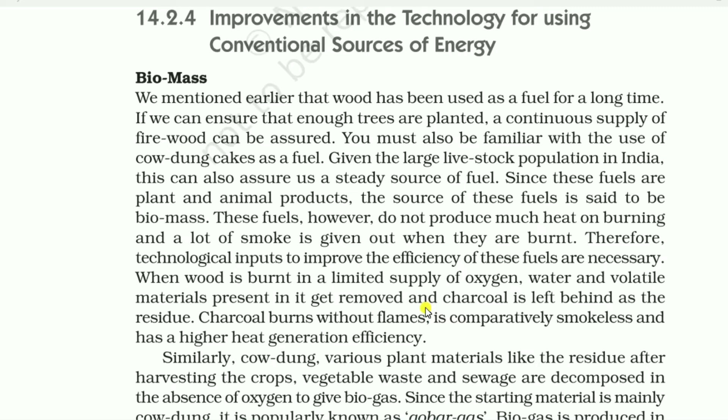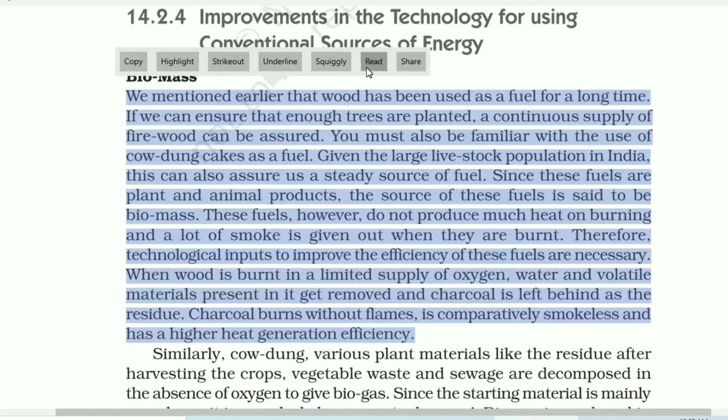So these two can be achieved from the fossil fuel, from the conventional sources of energy, if we improve it. That is the improvement in the technology. Okay, read this topic. We mentioned earlier that wood has been used as a fuel for a long time. If we can ensure that enough trees are planted, a continuous supply of firewood can be assured.

You must also be familiar with the use of cow dung cakes as a fuel. Given the large livestock population in India, this can also assure us a steady source of fuel. Since these fuels are plant and animal products, the source of these fuels is said to be biomass. Okay, this is called the biomass. So we are talking about biomass now. It contains two categories. One is animal and second is plant products.

These fuels, however, do not produce much heat on burning and a lot of smoke is given out when they are burnt. Therefore, technological inputs to improve the efficiency of these fuels are necessary. When wood is burnt in a limited supply of oxygen, water and volatile materials present in it get removed and charcoal is left behind as the residue. So this is called the pyrolysis method.

We know, when wood is burned, it will give you huge amount of smoke and the calorific value is very less. But still now we are doing that. But if we improve the technology in this method, then we can convert wood to charcoal. Charcoal burns without flames, is comparatively smokeless and has a higher heat generation efficiency.

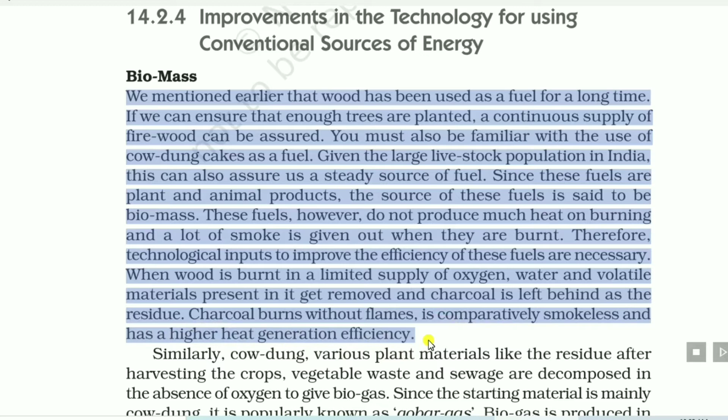Okay, you know also coal is a fossil fuel, it is a conventional source of energy. When coal is burned without oxygen, then it can be converted to coke, and coke is a better fuel with respect to the coal. So if this process is adopted, improvements in the technology, then we get coke.

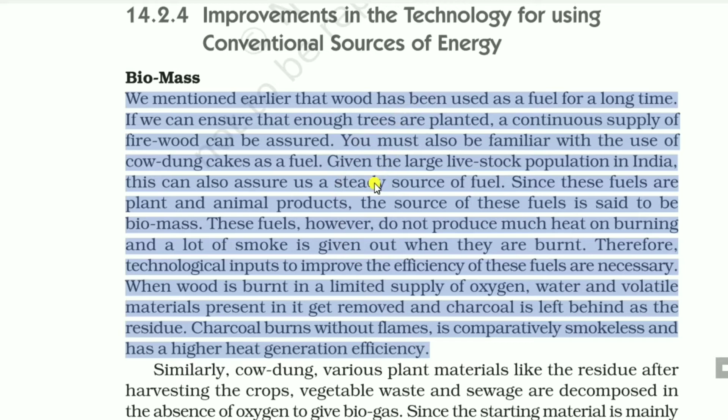Coke is a better fuel, it will give you high efficiency of heat, but less amount of residue, and also it will not make pollution in the nature. So that is needed. Charcoal burns without flames, is comparatively smokeless and has a higher heat generation efficiency.

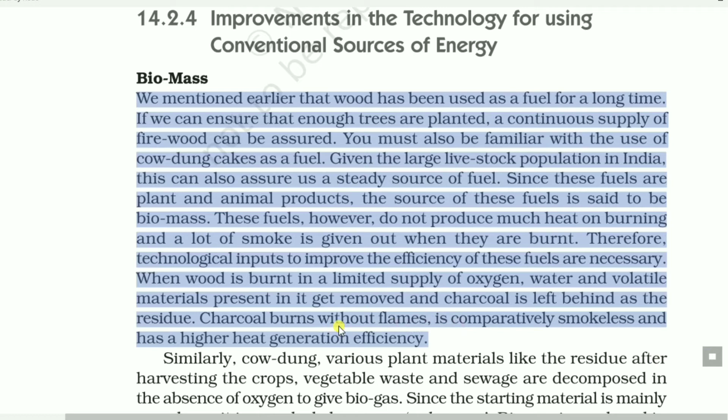Similarly, cow dung, various plant materials like the residue after harvesting the crops, vegetable waste and sewage are decomposed in the absence of oxygen to give biogas. Since the starting material is mainly cow dung, it is popularly known as gobar gas. Biogas is produced in a plant as shown in Fig. 14.4. Such type of biogas is formed in the nature.

It will give you different types of gases like methane, carbon dioxide. You know, these are the greenhouse gases, and after all it will give you the global warming. So if we use these gases in a technologically advanced way, then it will give you biogas, that is called the gobar gas. And gobar gas will not only give you 75% of methane, which is very good fuel,

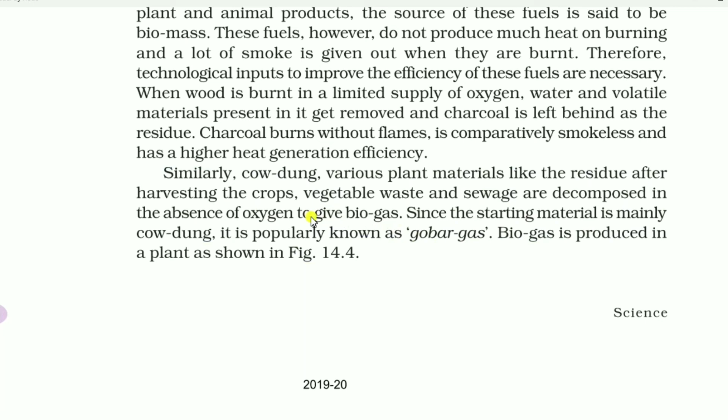the efficiency of the fuel is very high, and also the residue will give you good manure. Hardly any ashes will be left behind and the maximum portion of it will be used up, and it is also a green energy. So next, read the portion.

The plant has a dome-like structure built with bricks. A slurry of cow dung and water is made in the mixing tank from where it is fed into the digester. The digester is a sealed chamber in which there is no oxygen. Anaerobic microorganisms that do not require oxygen decompose or break down complex compounds of the cow dung slurry.

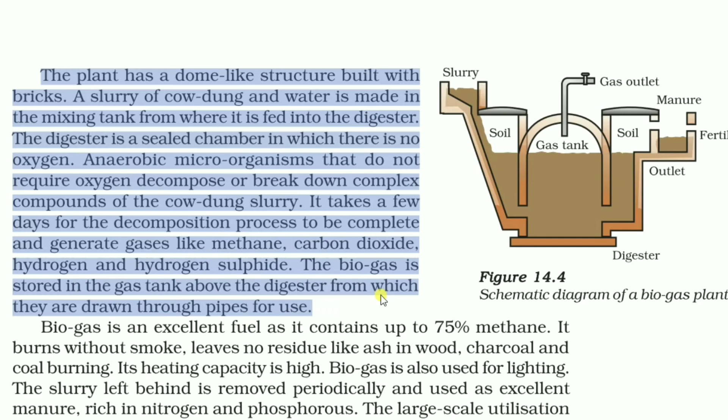It takes a few days for the decomposition process to be complete and generate gases like methane, carbon dioxide, hydrogen and hydrogen sulfide. The biogas is stored in the gas tank above the digester from which they are drawn through pipes for use. So biogas is an excellent fuel as it contains up to 75% of methane.

It burns without smoke, leaves no residue like ash in wood, charcoal and coal burning. Its heating capacity is high. Biogas is also used for lighting. The slurry left behind is removed periodically and used as excellent manure, rich in nitrogen and phosphorus.

The large-scale utilization of biowaste and sewage material provides a safe and efficient method of waste disposal besides supplying energy and manure. Do you think that biomass is a renewable source of energy? Of course, this is a renewable source of energy. It can be renewed periodically.